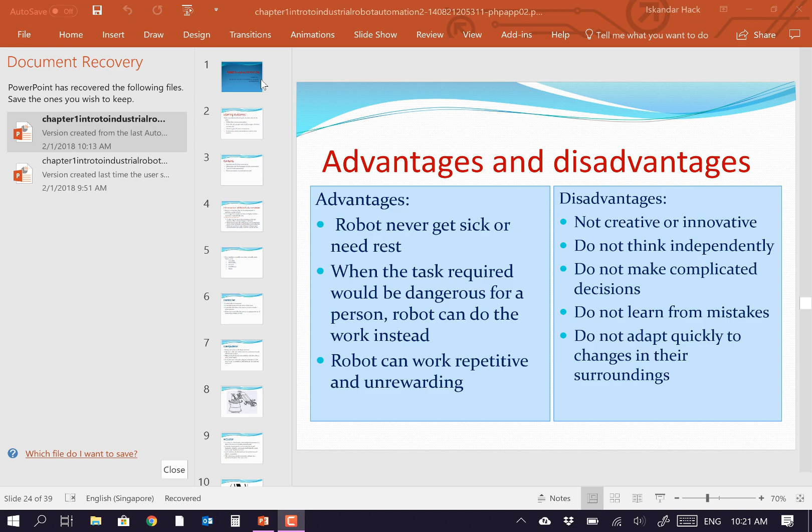Okay, I'm starting this from the beginning. There's only 39 slides on this, but I'll tell you a quick warning: probably at least 20% of the final exam last semester actually came from this set of slides.

These slides are relatively important, this is the general background, and it's easy for me to steal questions from them. I'm going to do things a little differently this time and have a real midterm exam in class. I haven't done that before, but I've been scolded for being too relaxed, so I'm going to have a midterm. You'd probably see a good portion of it, maybe even half, come from this set of slides.

So it's an important set of slides, even though there's only 39. I'll expand on that, and there are more slides that back this up with more detail. This is the introduction, but a lot of the exam questions I've asked in the past have been general background, like what is a pivotal joint, draw a picture. Those are all in this set of slides, and they're posted. I don't have a textbook per se for this class; I'm just doing it off these slides.

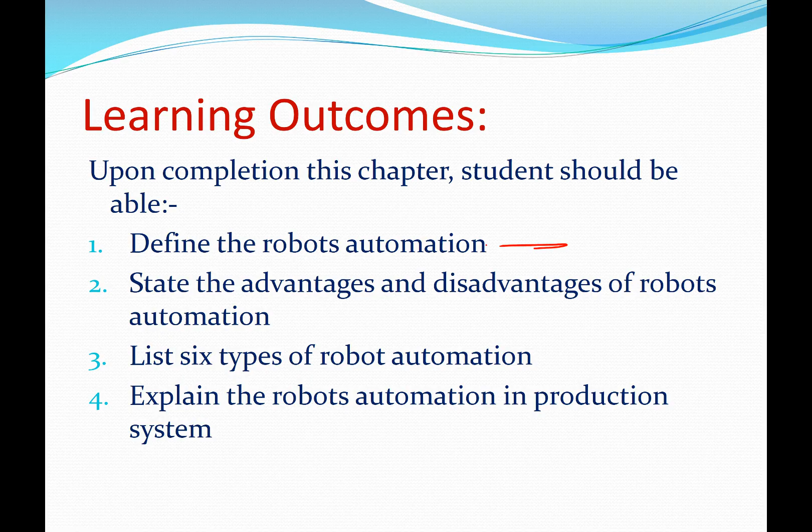So this is the learning outcome. And again, this just repeats the same thing. Okay, this is the definition: a robot is a machine that can be programmed to perform a variety of jobs. So robots can go from very simple to complex.

I can give some examples of relatively simple robots. One of my early jobs - I don't know if I talked about it in this class - was I worked in a factory. It was the shortest job I ever had. I only worked there 4 hours before I got bored to death. I was going to probably bring in an assault rifle and start shooting my coworkers, which is not an uncommon thing in the U.S. It doesn't happen very often here, but it does happen once in a while in the U.S.

My job was basically to sit on a stool and pick up a magnet from a table - it wasn't magnetized yet - pick it up and put it on a loudspeaker as it went by. We made speakers for cars and stereo systems, and it was a hand operation. Somebody would bring a big push cart full of magnets. The assembly line would walk by, and I would pick up that magnet and put it on that cone. Pick up the next magnet and put it on that cone. The next magnet, put that on that cone. And that was my job.

So these three laws of robotics right there, they could find their way on a final exam, and it's important that you know them. They're the ethical rules that we're supposed to follow when we deal with robots. Now, there's already exceptions to those rules, and that's created a huge controversy in many circles, but it's below our pay grade to argue those. We're just going to accept the three rules that we're supposed to follow.

I know that I've watched documentaries of people that work for the Air Force who operated drones that have really come out against them. But the first one is the robot is not supposed to injure or kill people. That's obvious, you shouldn't be designing killing robots. Unfortunately, people have already done it, but we won't get into that.

Robots must do what they're told, right there, and a robot should protect itself in some ways, except for when it conflicts with rules one and two. You notice that each of these have the word 'except' in them, and again, 'as long as.'

So in other words, these three laws of robotics: number one is absolute, robots shouldn't kill or injure people. Two is it should do what it's told, except if it's told to kill somebody. And three, it must protect its own existence, except if it's going to violate one or two.

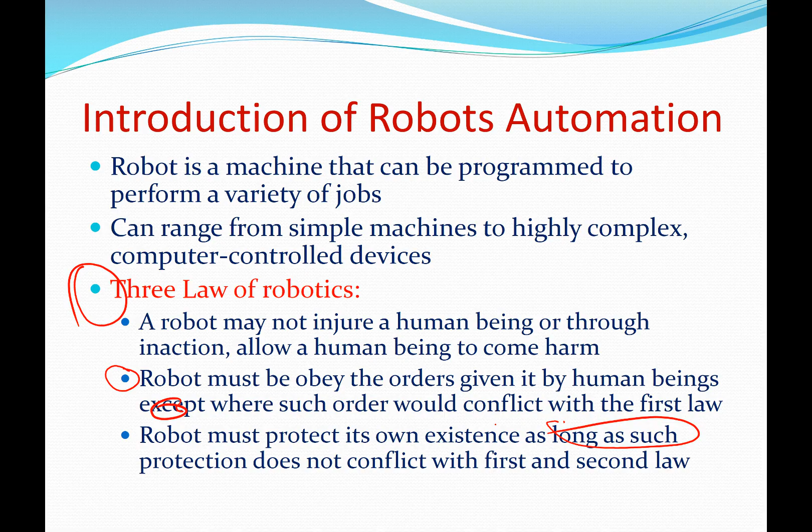The controller is the brain. It's usually a CPU or computer. In the human being, it's a brain. Now, if the brain malfunctions, of course, the robot malfunctions.

I'll look at myself as an example. We've got the human brain, mine's broken, I've got defects in my brain. I had a stroke. A stroke is parts of your brain being killed off. So if you look at my MRI, you will see two sections of my brain where there was a blood clot and oxygen didn't get to that part of the brain.

And I spent almost about three or four months, about two months in a wheelchair, and another two or three months using crutches, a cane, and a walker. I lost the ability to walk and I lost the ability to use my right hand. So that part of the brain is gone, part of the left side of my brain.

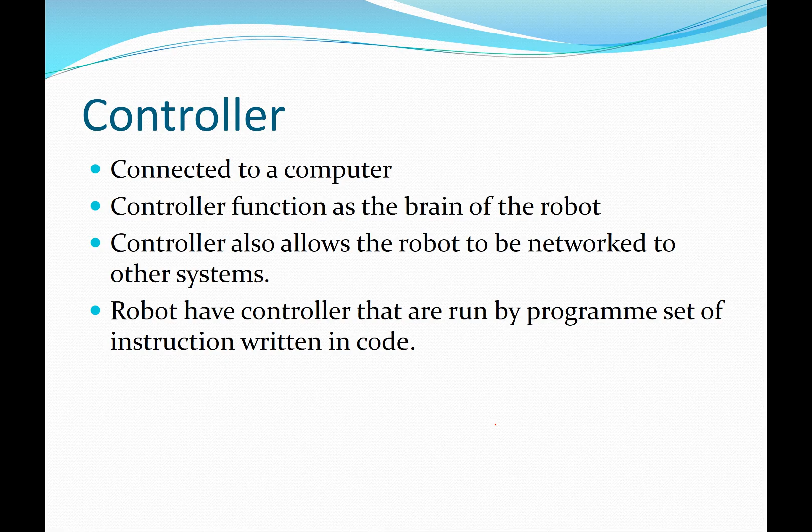The manipulator, that's the arm. Now, I have trouble with my arm, shoulder, but of course my problem is not the arm. My arm works fine. The muscles are in good shape, and I go to the hospital and they make me exercise the arm. But in my case, the controller's broken.

But the robotic arm comes in all shapes and sizes. The arms that we're going to see are relatively small. Our robots are about this big - I'd say about half a meter by half a meter size or something like that.

But the arm is what positions. When we look at the human arm, it's got a shoulder, it's got an elbow, and it's got a wrist. Those are the three major joints in the human arm. Robots have the same type of thing in some cases.

Some cases they don't. If you look at the iRobot, for example, it doesn't have any arms or anything that goes around. It's just got wheels. It moves around out there. And then it's got a vacuum cleaner and a little brush thing that spins around. It's a typical vacuum cleaner. I call it the iRobot - that's a brand name out there, but it's a robotic vacuum cleaner.

Cars, of course, don't have arms. Robotic cars, self-driving cars, they have steering. They have wheels and they have things to steer. They have brakes, but they don't have arms to pick up things.

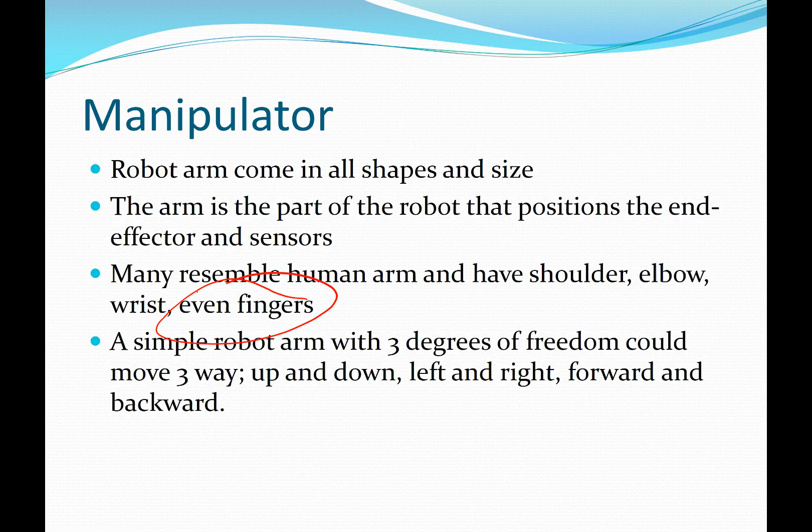I could walk before I could pick up things. But the manipulator is the arm. That's the easiest way to remember it.

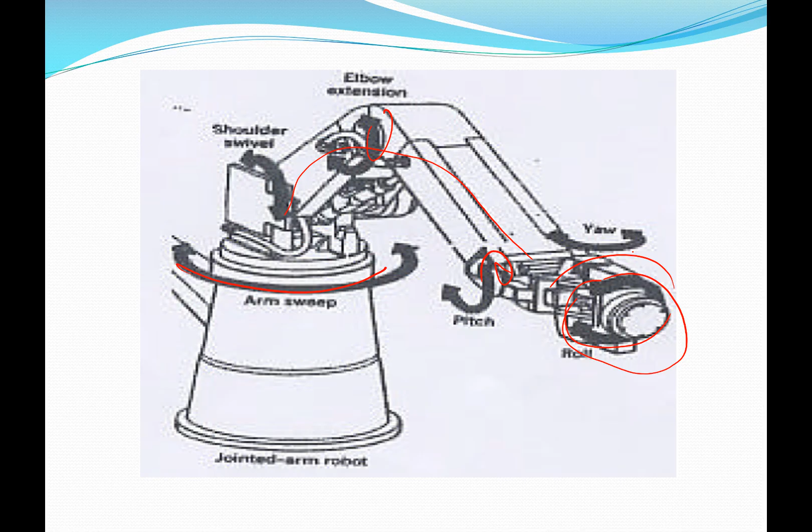And this kind of shows again, here's the arm right there, and then they're showing, of course, the wrist that's there. This is somewhat similar to our robots. We've got the movement that goes this way, sweep. We've got the shoulder that goes up and down. We've got one elbow. We've got something that pitches the wrist. Then we've got something that turns this way, like this. We don't have this yaw thing. Then we've got the grip right there.

The actuator is used out there. Now the actuator is actually the muscles. So when we look at the manipulator, it's the arm, but something's got to move the arm, right?

In the case of the human being, we've got muscles that contract. We have a muscle that when I put my arm out straight, it stretches my bicep. When I bring my arm this way, my bicep shrinks. The muscles contract right there.

And if you're a bodybuilder, guys like to show off their big muscles. Trust me, I'm 60 years old, I don't have big muscles to show off. I used to lift weights, and I had big arms at one time, but those days passed about 15 years ago when I got in my mid-40s. I mean, there are 60-year-old bodybuilders, I'm just not one of them. So that's right, I've aged gradually.

But the actuator is the mechanism used. There's 3 or 4 different types that we'll talk about. Pneumatic and hydraulic are similar to each other. There's both pneumatic cylinders that usually move linear, or rotary that turn. So the 3 key ones that we have are pneumatic, hydraulic, and electric, really.

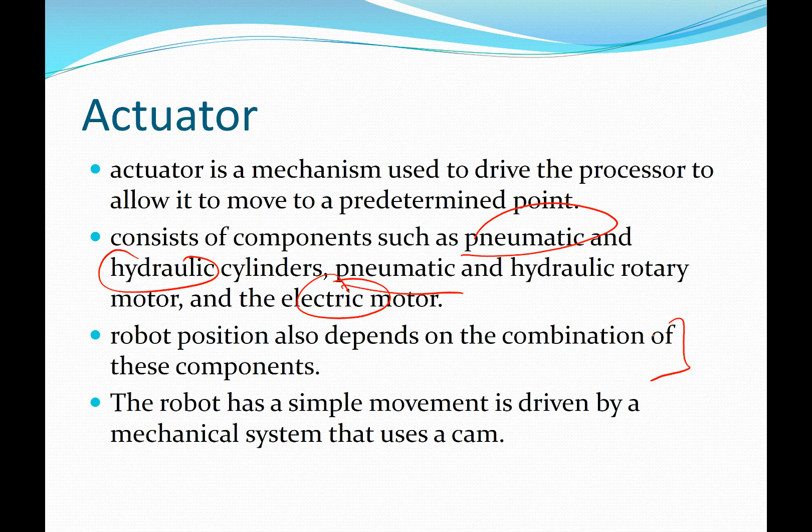So the robot has the arm, and this is just a cam—not a very good picture. The end effector is the important thing; this is what actually does our work. It's the gripper, it's what grabs whatever we're working on. It can be a vacuum pump.

So you can have hooks, you can have scoops. If you want to tow somebody's car, the old way used to be you took a hook and hooked onto the front of their car and picked up the front of the car and just drove it down the road. Or used to be the back end—when I was growing up, that's where the transmission and the emergency brake was—so you could always pick up the back end and pull the car behind. Now they put it up on a bed, but you can have scoops.

If you look at, for example, a piece of construction equipment that digs holes, they have what they call a scoop shovel for picking up this way, or a backhoe that picks up this way. Those are scoops.

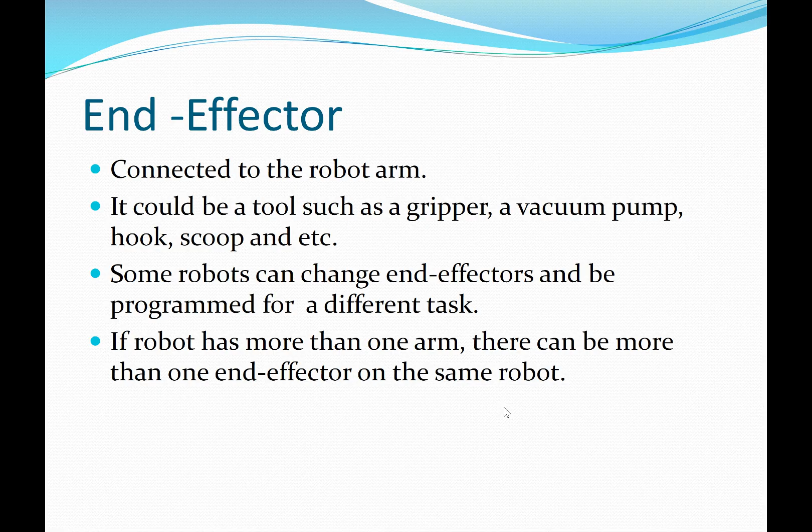Now we have our last part, and I'm going to keep on going—I don't know where I'm at on the slide. But the sensor provides feedback to the control systems to get the robots to work. In my case, I've got my eyes that tell me when my hand is on this mouse.

Part of my sensors are gone right there. I don't have any feeling in my thumb and forefinger, so when I pick this up, I literally have to look at it, I have to see it. Most of you can probably put your hand down there and pick this up without any problems, but I have some sensory issues with that. But there's 4 types of sensors right there.

You'll need to know the 4 sensors, and you also need to give me examples where they're used. One of the places where I take off a lot of points on the final exam is when I ask, explain what a position sensor is, what it does, and give me an example where it's used. A position sensor might be used to determine the location of the arm or the location of a particular object, or for example, your GPS coordinates for your car, where your car is at.

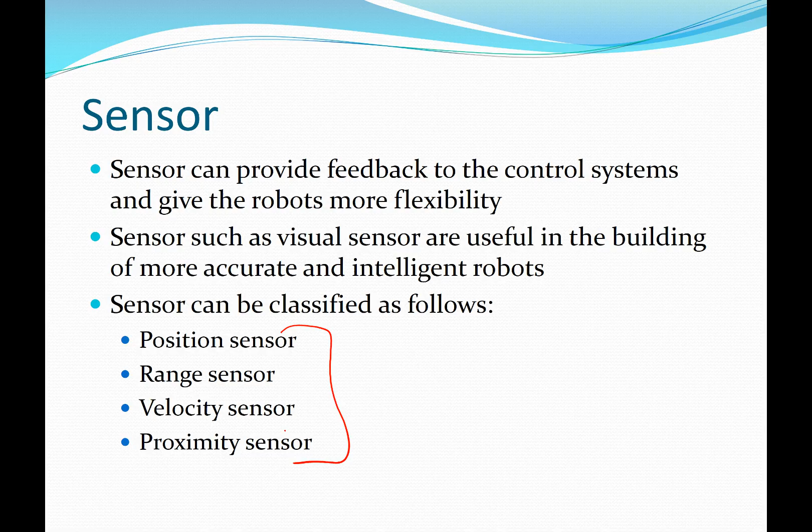The human brain, in the human body, we talk about 5 senses: taste, touch, smell, hearing, and sight. Those are the primary 5 senses. Now, other people talk about other senses that we don't normally discuss, but those are the 5 senses we process as humans. When we deal with robotics, we'll get other types of sensors.

Power sources - I've already talked about that: hydraulic drive, electric drive, pneumatic drive. The hydraulic and pneumatics are usually pumps, usually electric pumps that provide air pressure or hydraulic pressure. So almost all of the power source for almost all robotics is usually electricity of some form. The exception would be, for example, a vehicle that may have a gasoline, petrol, or diesel engine that drives that. But when you're looking at industrials, they're almost always electric motors that generate the hydraulic pressure for a plant, or pneumatic pressure.

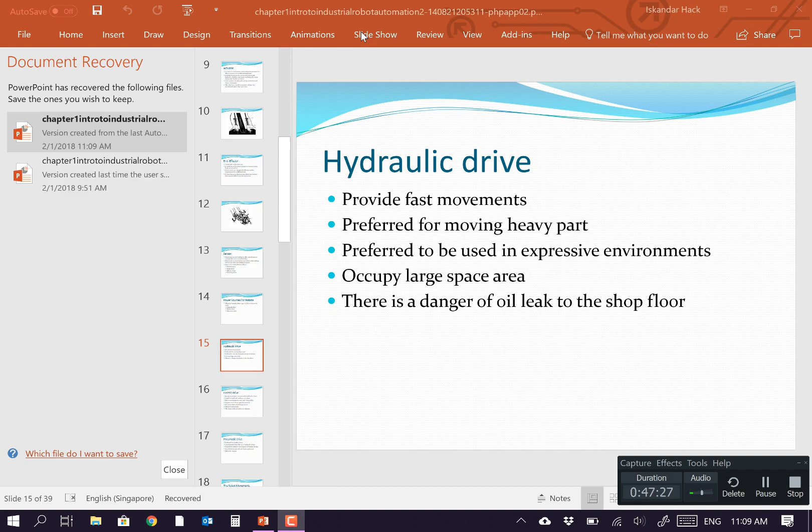Hydraulics are usually very fast. The main thing about hydraulics is that they're generally for heavy uses. If we want to, for example, move a car down an assembly line, you probably don't want to use air pressure for that—it's not powerful enough. You usually use some kind of hydraulic, or in most assembly lines, they're using electric.

But if you want to pick a car up to get underneath it and work on the brakes—lift the car up—you're going to want to use something like a hydraulic. If you want to pick up an engine and place it into the car chassis as part of the assembly process, you're probably going to have a hydraulic pick up that engine block. That engine block is heavy. Back when cars were made in the dark ages, when I remember seeing assembly lines that made cars, they used chains, and people pulled up the engine, brought it over, and lowered it down and placed it inside the car chassis.

Nowadays, a robotic arm picks up the engine, places it in the car chassis, and a couple other robot arms come and bolt it to the engine mounts. It's completely automated now, not done by hand.

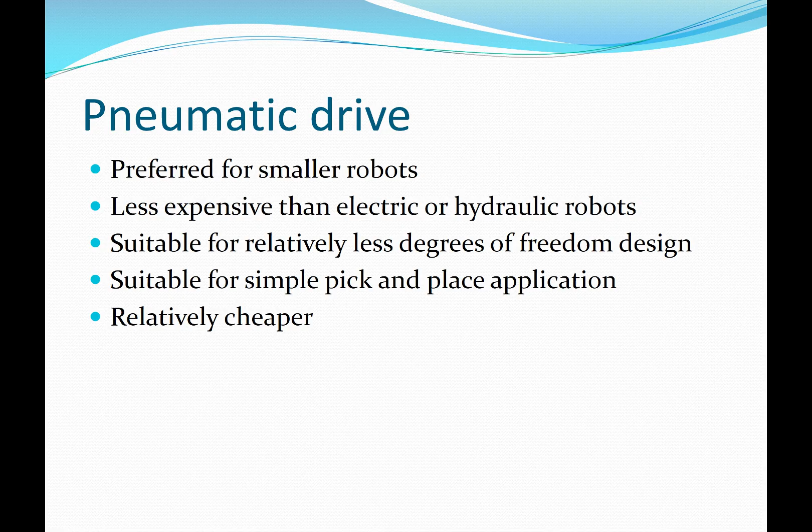I was going to do a double class, but I think I'm going to stop here and we'll get into movements next time. This is a natural place to end a lecture - 39 slides, I can talk a long time on those. When we look at the robot, today was really pretty much Introduction to Robots - we went through all the parts, and next we're going to get into the movements. That's a completely different topic, and I find the human brain absorbs one subject fairly well, but as soon as I change gears, it gets confusing - you won't remember the second part, or you won't remember the first part.

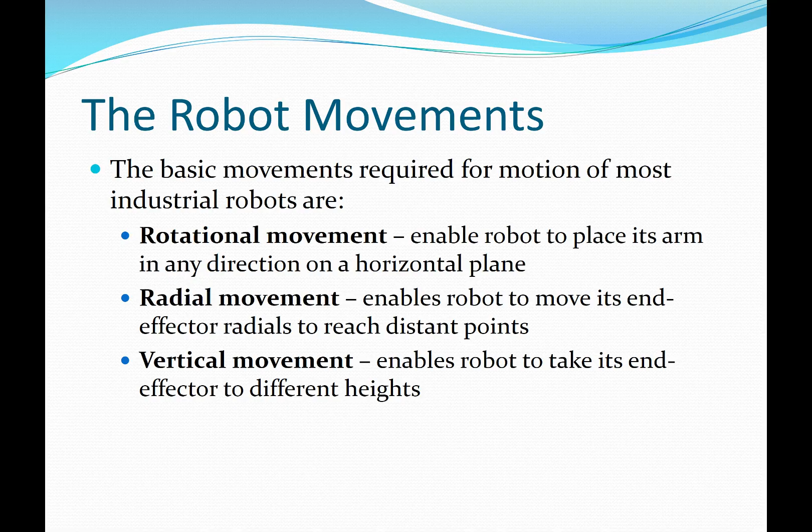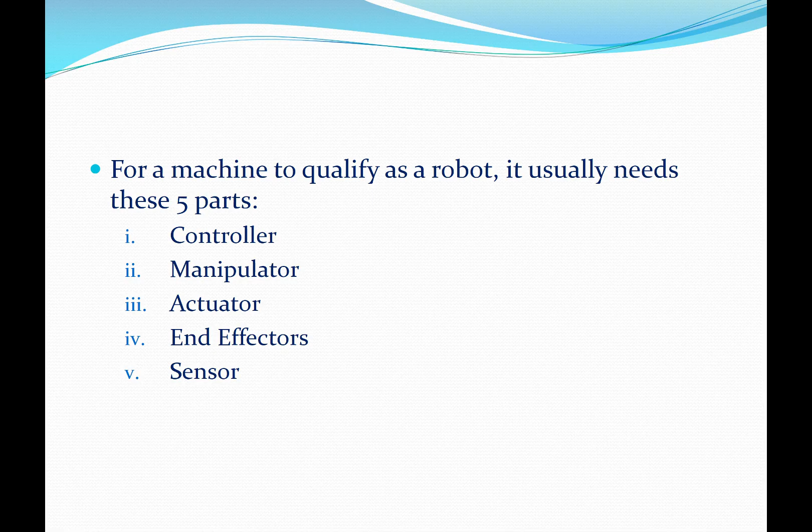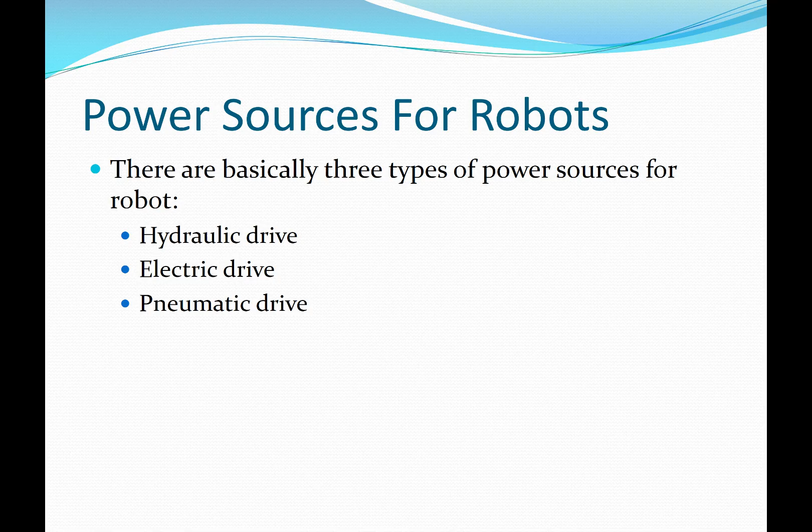Today's lecture was predominantly over the major parts of the robot. When we look at the major parts, those are our 5 major parts: the controller, the manipulator, the actuator, the end effector, and the sensors. And then I ended it with our 3 power sources. So really we had 2 topics, and getting into the motions will now be a 3rd topic. Regardless of my energy level, there's always a good place to just end it for the day.